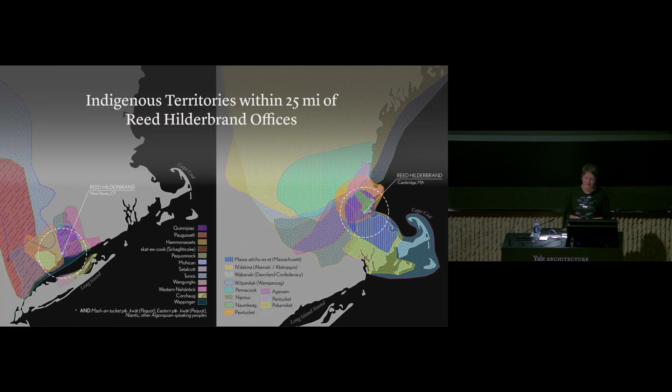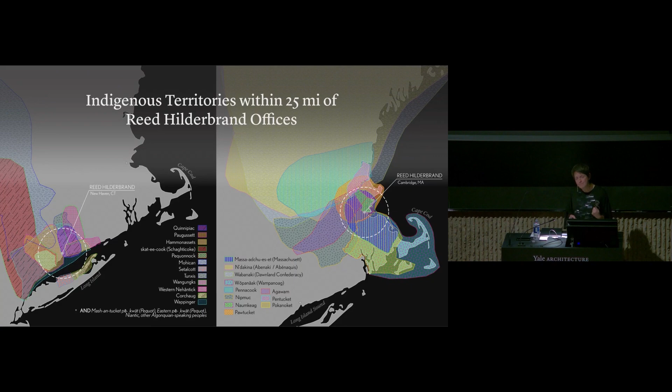As a practice at Reed Hilderbrand, we continue to try to understand and draw through the overlapping histories we live with. This is a set of drawings, or part of a set of drawings that we made a few years ago, to try and map and think about the unceded lands that we live and work on.

It is hard to comprehend how strong the forces are that drive people, and we try to listen to both the stated intentions and the unstated motivations.

We seek to make a world where humans and plants, rocks and rivers can all flourish. And together with our communities, with our clients, with each other, we identify goals and solutions. And I just want to say, that's all of you together, right? It's not just the people at Reed Hilderbrand or our clients. It's all of those of us who are in conversation together.

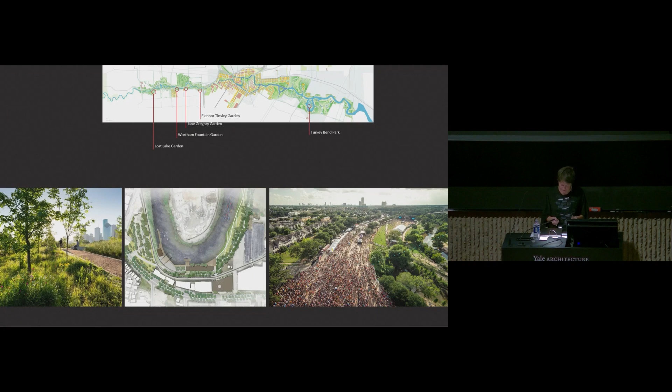I think the need for gardens and oases, even in these larger systems and places, is absolutely critical. So this is an image of one of our gardens that we've worked on. And the idea that civic horticulture can relate to the scale of these much larger systems is something we believe in keenly. We're a practice of 70 people brought together by our desire to reconcile human and natural forces.

And I think of us as having a practice of attention and even love for the world. We mostly work nationally, but there are some communities and places that we are particularly bound to. Boston, New Haven are where our main studios are, but also Maine and Texas, where we have excellent outposts. And we are very much better and happier because we have each other.

So together we ask a lot of questions, we test endlessly, trying to find solutions that satisfy our standards of collective intelligence.

There is not a single scale or typology or problem that we focus on. We seek to do work where we can really dig in and find beautiful solutions. And we believe in change.

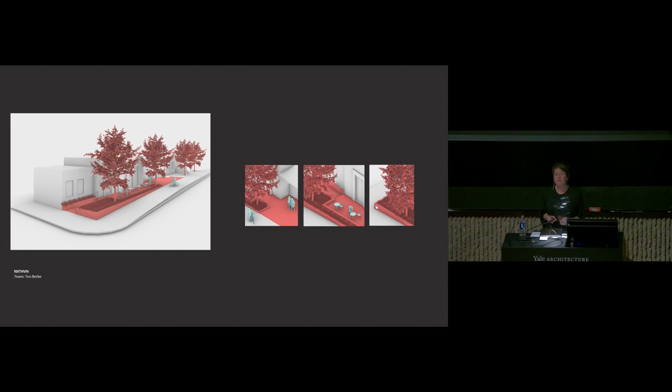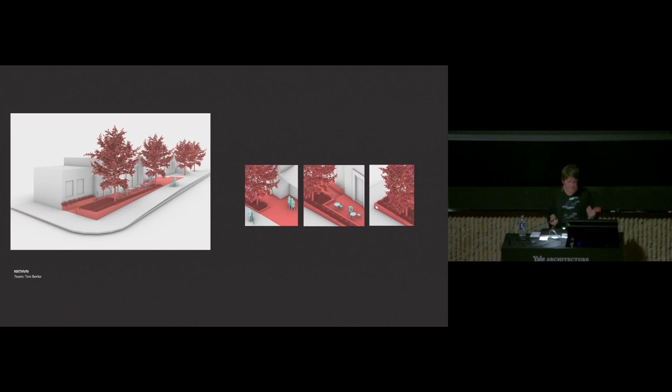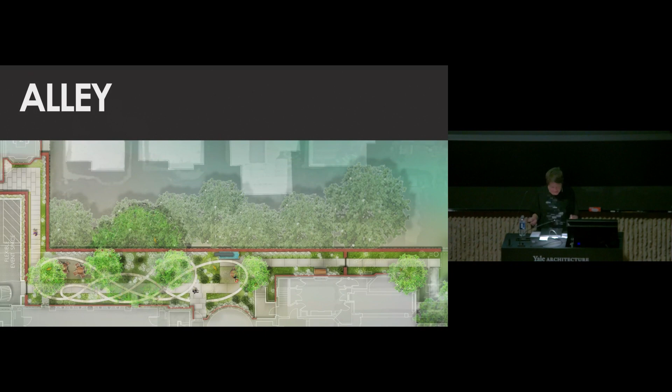The next project is one we got to do with George Knight and his amazing team, just around the corner, for the Yale Center for Catholic Life at St. Thomas More. George said, I think maybe there's a project for you here, Beka—we have to make an accessible exterior connection, and there's a parking lot. So the invitation to take this very narrow piece of land and turn what really was just a required code condition into something so much more was a chance that we jumped at.

And they feel that they have the most beautiful parking lot on the Yale campus. So this idea that you can have a garden and a ramp is something we believe in.

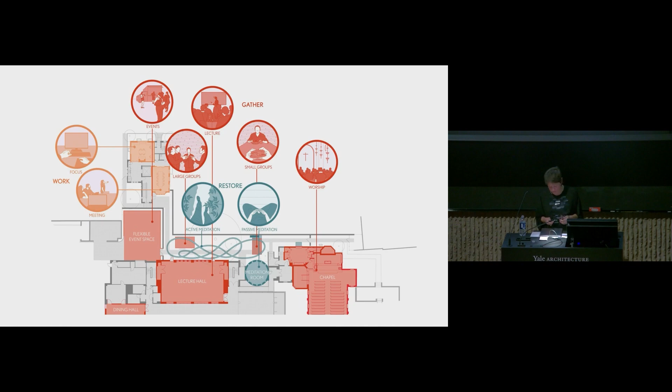And then I think something that happened is that this space turned into something that offered so much more to their community. The last thing I would suggest is that very small spaces can be places of replenishment and spirit.

So the last little micro project here in New Haven is the reclaiming of a parking lot to make more parking. This is over by our office on Whitney Avenue, a project for Fred and Laura Clark. The idea was that we could sandwich a grove of trees under a towering oak and take away 2 parking spaces from the sea of asphalt, still make parking for them and their 2 cars, but have that space also be like a garden in its interiority and finishes.

So here you see that grove of trees that the home is nestled in, the roof of the carport. Andrew actually worked on this with us too.

Uh-oh. Come on. Well, that just went awfully fast. Let's see if I can back up.

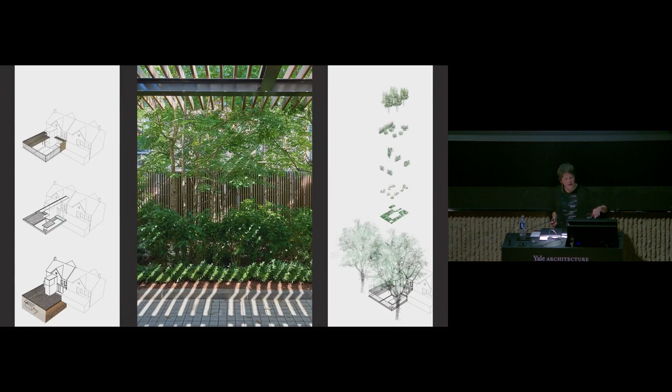I'll skip, actually. So I think just super briefly, when you're working in a really compressed space like this, operating vertically is really critical for a landscape. I don't know why these are glitchy, so excuse me.

And then I think there's sometimes very strange conditions that can emerge, but they are incredibly poetic. So that's my last thought about the actions that are possible in very small spaces in our immediate city.

The next subject that I wanted to tackle is the idea of fragile land. I think we have, unfortunately, an idea that once we know something is super delicate or super worrisome, we want to protect it. And the problem, sometimes ironically, is that we can't go there anymore. So we stop valuing it because we don't engage with it, and we turn our backs on it, and it becomes background, or worse, erased from consciousness and value. So this is a series of 3 projects that look at that issue in one way or another.

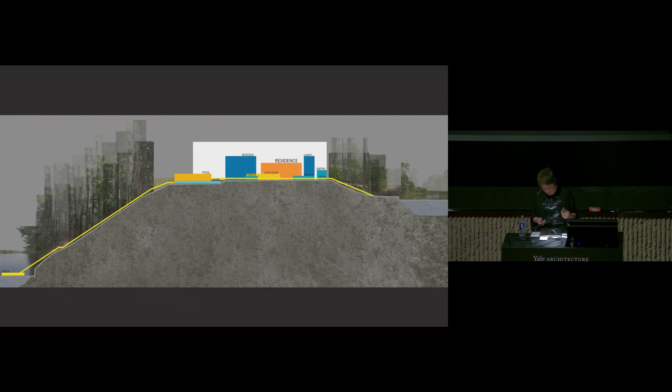So where it says Bosque, it was really important to us that the architecture and the home always be held.

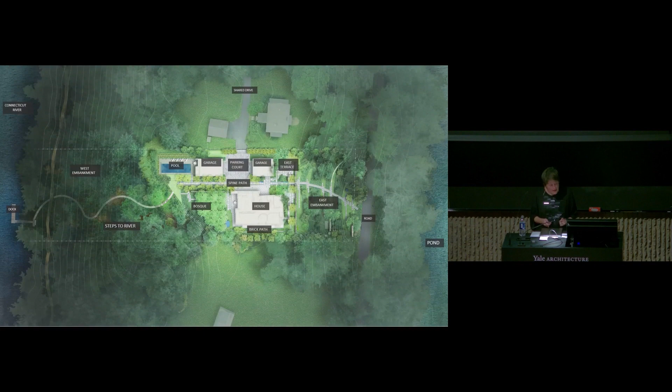And then this is the plan that we arrived at, with a series of terraces and spaces for life in actually a very narrow suburban lot.

And this is a home that we designed to meet institutional standards of access on this plateau, but where we also really committed to steps.

So this is 53 steps up from the pond, and they're very comfortably integrated into the garden with a series of terraces. We used local stone and tried to create a sense of a woodland stroll, even as you're working so hard to go up and down.

And because it's basically a typical lot in its dimensions, we also worked hard with immersive and vertical plants to bring the plants in the sky close. There are small pools for birds all throughout the little bit of project.

We did make a swimming pool, which is very popular with their children and people who come all the time. This also, I think, possibly featured.

There's a new opening by Cara Romero, an amazing indigenous photographer, who's opening her first show at the Hood Museum just now, and she did a shoot in this pool.

I think the most interesting part of the project, which gets back to the fragile land part, is this set of stairs we built, about 195 stairs. We thought of them as part of this whole detailed set of connections, things you can touch, look at, and interact closely with. But these steps needed to be mobile and adaptable, because we couldn't change the earth and we couldn't change any of the trees. We needed to adapt, and continuously adapt going forward.

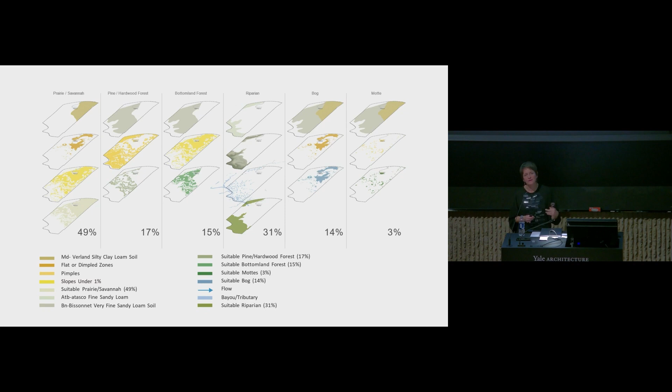So we worked with our team to try to understand what was happening and what the earth wanted to be and wanted to do. I think this is the kind of thing we're all going to have to do a lot more of with what we're seeing with the climate. This is a bit complicated to interpret, but the big finding was that basically the soils here really wanted to be prairie and also wetland.

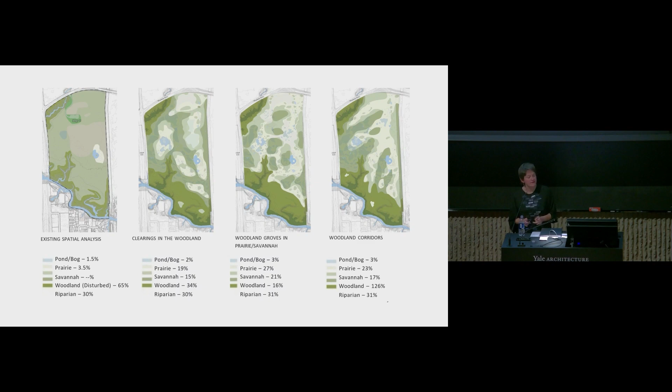So then we talked with the client and amongst ourselves as a team, and this is a set of possible futures that we mapped out. In the end, I think the idea of the woodland corridor and allowing the land to return back to prairie was where we found ourselves.

Sometimes you explore these things privately, or in a more experimental, perhaps precious or small scale. But one of the reasons we love to work with individuals is that you can investigate things in a very deep and clear way that then can become very influential for much larger issues or more bureaucratic clients.

The next series of projects takes on a different issue, which is that we have mostly privatized land in the United States, particularly on the East Coast. Obviously the people who have access to that land—it's a predictable story about who has experiences with beautiful, powerful, large, expansive landscapes. It's not a fair distribution of that kind of experience. So we've been really lucky to work with a series of organizations committed to changing the relationship that people have with land.

I'm going to start by talking about the Clark, but also our relationship with Williams College Museum of Art. These two projects are down the street from each other in Williamstown. Then I'll close this little chapter—basically all about museums trying to offer land and art back to people—by talking about a project that's just about to open at Storm King on the Hudson.

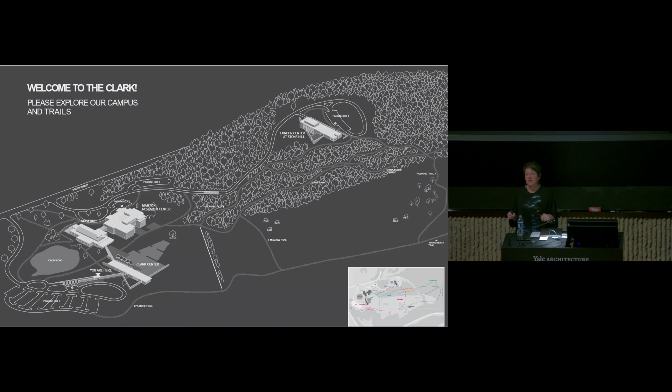I think one of the things we brought very meaningfully to the Clark was the idea that actually walking in their woods could become a strategy for the campus, and that has really worked.

Also, back when we did this, the idea of not paving for parking, or for the fire chief, was quite radical and required a lot of negotiation. I think it's now something we see a lot more. But the sense of terracing to just achieve the kind of use you needed was an important part of that earlier project. Also, really inventorying the plants that are there.

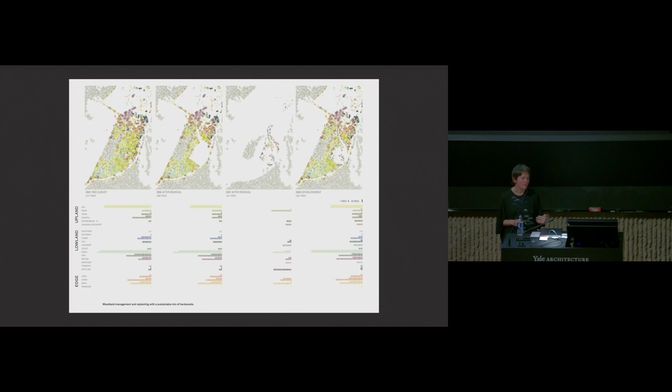So we did a really careful study of the forest, what we were removing and what we could put back to make a healthier, more adapted forest. I wanted to show these old models of the grading we did, just so you could see more closely how those terraces worked to minimize the degree of clearing.

A simple lesson we brought from the first part of this project was that we should work with the engineers and combine and bid from a procurement point of view. This may be a little technical, but we should make the buyout one where you couldn't just do the civil work without the landscape. That had been a failure in the first part of the project. There was no accountability from the civil or the first part of the contract to the end. So this part of the project was much more beautifully integrated.

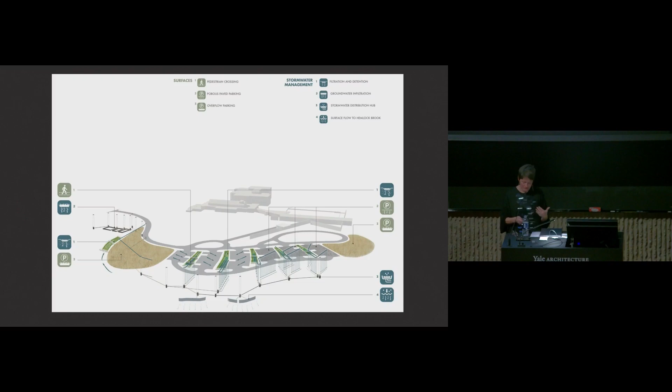In the end, this is a diagram we did with Gensler to really talk about breaking down the divide between building systems and landscape systems. This was considered very groundbreaking at the time, and I've yet to work on a project so committed to the sense that all the systems and infrastructure need to be conceived as one. We actually produced net cost savings for the project with this strategy.

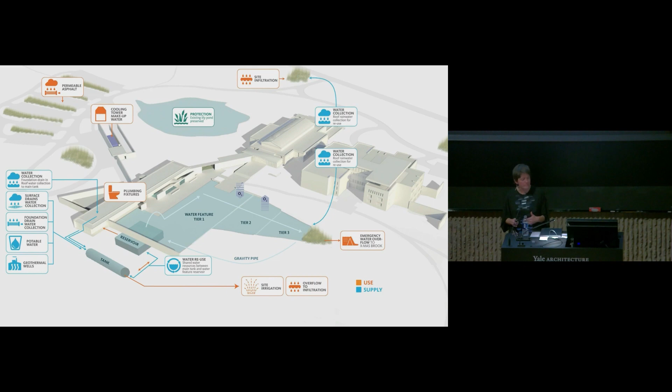We always had to price it against conventional methods, and I think if the cost hadn't worked in our favor, I'm not sure we would have succeeded.

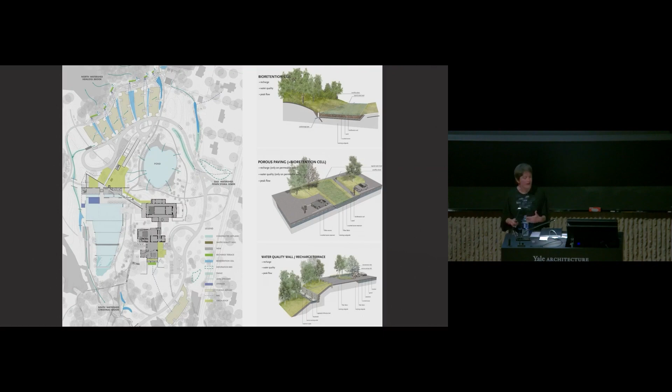I thought I'd show these old drawings at this point, the green infrastructure strategies we used, and the outcome of those — you don't really experience, between the grading and the strategies, the sense that there's parking right behind your head. It's just an embedded part of the experience here, but mostly it's background.

And the last slide is just to say we sized everything with the water feature to minimize the mechanical. The water source itself was the dewatering from the basement — it's a sort of self-circulating system.

But one of the beautiful moments of finding that solution to minimize mechanical drivers was the degree of performance we've ended up with, in terms of play and theatrical and intimate conversations on those stepping stones.

So to talk now about Williams, we were initially invited to work there because they thought they weren't doing a good job with their landscape. They said, we actually know we can do better because we can just walk down the street and see what you did at the Clark. So we think somehow you have to tell us what we're doing wrong.

The answer was actually kind of straightforward. They had done what a lot of organizations are doing, which is to meet their accessibility goals by just leveling everything. But the whole quality of what's beautiful about this landscape is that it rolls and undulates — there's a lot of movement of the ground. So when they were leveling that and then building very thermally efficient buildings with giant mass, they were creating dead ends and cutting themselves off from the landscape that makes Williams so meaningful for so many people.

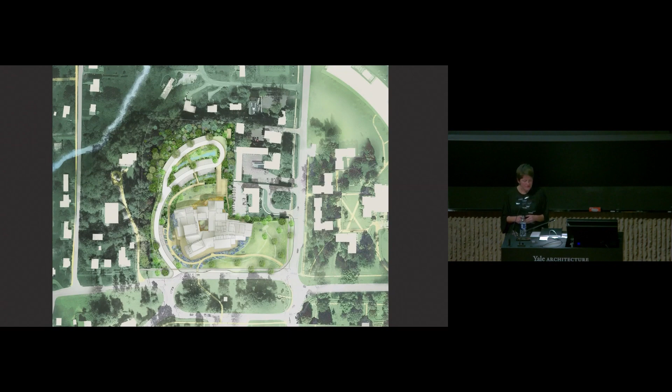This is a project we're doing with Selldorf, which has been really quite fun. We just completed our 100% CDs. In this project, you can see the campus map, the location along Hemlock Brook, which is the same brook that the Clark is on.

We began by doing an ecological assessment, trying to understand what was healthy in the woods that they had. The finding was basically nothing — it was so much worse than anyone had predicted.

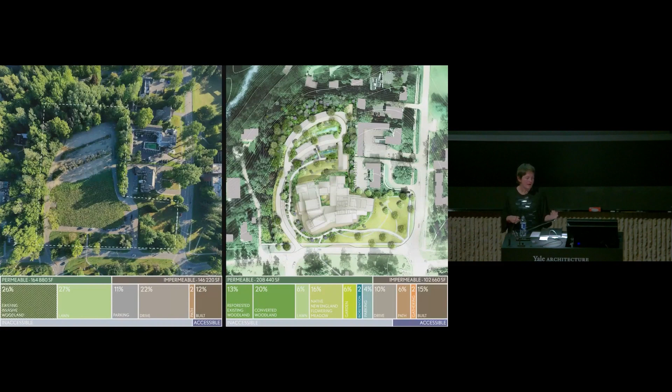And then this is where we are now with a strategy to produce much more biodiversity, much greater ecological vitality, also a much wider array of experiences. This is still a very large Williams building, as you can see from the roof, but the idea is that it is constantly reconnected to nature.

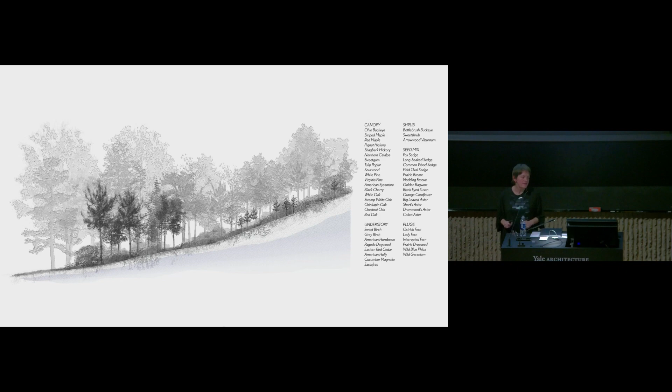There are a couple of things I wanted to highlight that we did that we haven't done before, lessons learned from the two Clark projects. One is early planting—limiting the area where the architectural project needs to happen, but saying there's a whole area where we can plant and improve and get started, and it'll be so much less expensive if we do that now.

So we have early planting going in with bare root material to reforest and diversify the edge this spring. And we've been working closely to trial true native species diversity, sourcing from different nurseries so that all the plants aren't just clones.

Additionally, something we're even more excited about is that we think this project is going to be the first in the United States to use meadow sod, which they've been using in the UK. One of the giant challenges projects have, particularly campus or institutional projects, when they want to be more biodiverse, is the recommendation to build a meadow—but meadows take 3 to 5 years to establish.

So in the end, they end up just putting down turf and lawn sod. Our hope is that with this strategy of unrolling a carpet of meadow, we'll be able to change that future and create a much more robust ecology. We're piloting a test across the street right now with the Williams facility, so we're hoping it'll be successful.

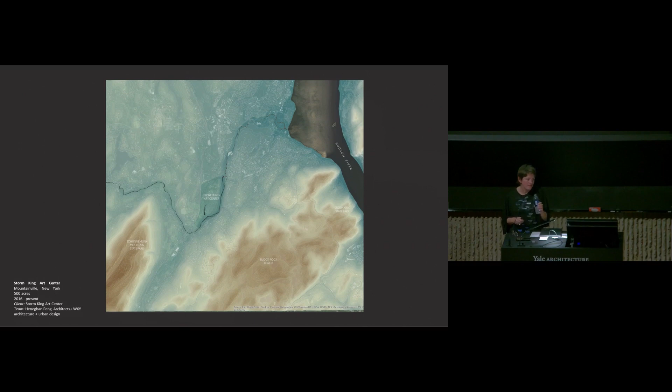Storm King has a long history of land art, thinking of itself as an open-air museum, really connecting artists and people with nature. It also has a long history of accepting that it used to be partly a gravel mine for the thruway that passes right along it. These made landforms, made meadows, and the practice of burning to prevent invasives and maintain a healthy ecosystem—these are all things Storm King has done way before most organizations. They've really been a leader in both design and ecological management.

Part of what is amazing about working with Storm King is the deep love artists have for them, and their commitment to both emerging and established artists. Jean Shin, an incredible artist I recommend to you, took the dead trees we'd had to fell because they were sick, and made a work called Allée Gathering, which became a site for all sorts of fun and joy the following summer.

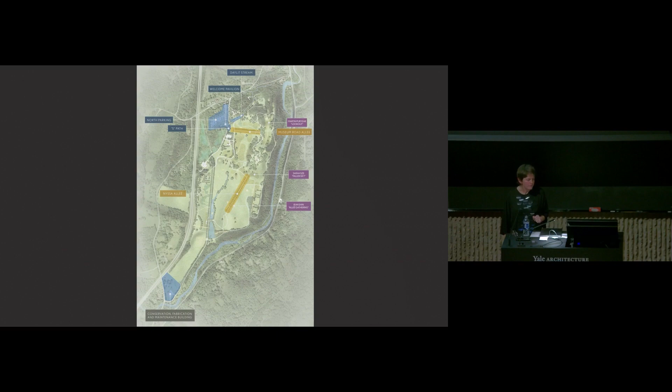This is a simple map of the set of projects we've done with Storm King since 2016. I'll talk about just a few of them, but it's very much an iterative process. There are different opportunities, and we work across scales and in all sorts of ways with them. Pretty much anything they ask us to do, we are excited to do.

One of the amazing opportunities we had was to work with Martin Puryear to help him make one of the most extraordinary commissions of his life as accessible as it possibly could be. So we worked on this paving pattern and drainage strategy with him, and so far I think it's been a success. The project itself, Martin's work, Look Out, I cannot recommend enough, and I think you should all go if you haven't.

This is a quick diagram looking mostly at the capital project we're working on right now, which is going to open in May of this year, and just trying to identify some of the small pieces we've done. The biggest and most important part of the capital project was the idea that Heneghan Peng, WXY, and Storm King had of taking cars out of the center of their whole landholding and consolidating them to make the visitor experience much more straightforward. But how you make a giant parking lot not feel like Walmart, and actually produce positive ecological effects, is an interesting question. So this is a plan of the detailed part of the project.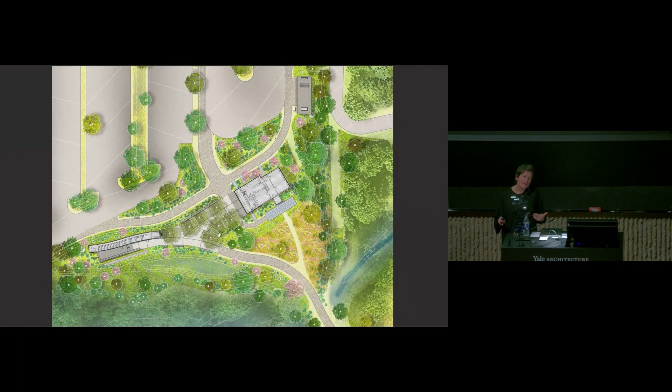With a little bit more detail, one of the things Storm King is committed to with this project is a superlative visitor experience for everyone who arrives. Pretty much the first thing everybody needs to do when they arrive is go to the bathroom. So this is a really simple project where you can get a ticket, be oriented, be made to feel really comfortable and welcomed, and go to the bathroom.

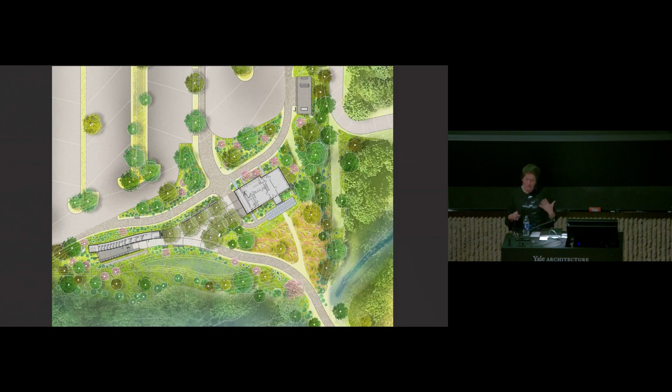So, to my last chapter: the idea of shared ground. I have a kind of giant plea for all of us that we understand the world, and a place, as something shared and a place of kinship. I think one of the places we've gotten to most beautifully design a future for that kind of experience or belief is at Long Dock, basically just across the river from Storm King. This is a place that had an incredibly complicated and contaminated site because of its rail yard use before we started to work there.

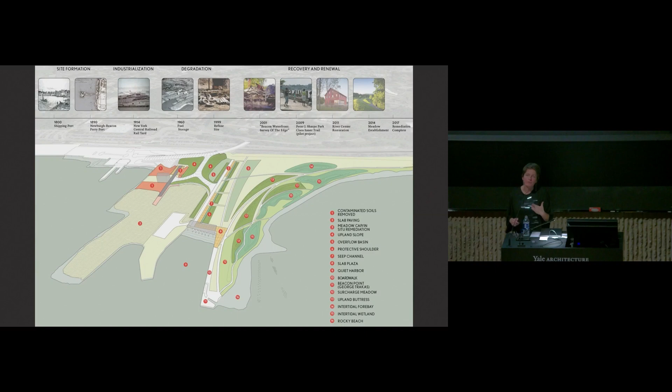Scenic Hudson had invited us to work on this project, which we did with ARO and Adam Yarinsky. I think the idea was that we could have places of education, but more powerfully, we could bring people to the water, and we could actually handle and change this contaminated site while still managing the floodwaters that are a routine part of life here on the Hudson.

So this is a project many people have heard of, Mount Katahdin, but this is a project that we did and were invited to do with the Wabanaki Nations and the National Park Service through the Elliotsville Foundation. The idea was to take these 23 acres and make a contact station to connect people with the land and the waters and the sky. The idea that this is one of the places at first dawn, and that there is an enormous need to recognize our connection to the forces of light and to the woods and waters. It's really important, a motivating part.